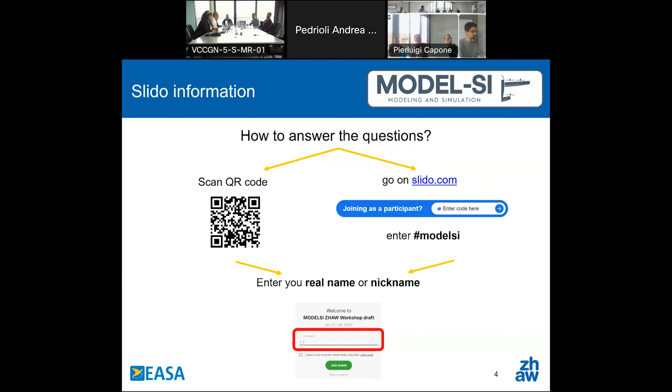And I will now hand over to Laurent Pinsard, technical lead, for a short background and rationale of the project. So first, we should remind you that modelization and simulation is a part of the EASA research activity program. And the objective of this EASA research is to explore methodology to determine loads on eVTOL.

Why have we selected eVTOL? In fact, eVTOL incorporates already lots of unique characteristics, like several rotors, which develop thrust and lift. We have also a complex aerodynamic with rotor interaction. We have fly-by-wire. We have flight conditions which are also unique, like hovering, forward flight or transition phase. And more particularly, we have also more demanding requirements for certification, like a rotor burst with a cascading failure scenario. So for all these reasons, EASA considers that eVTOL are a very good candidate to explore the complexity of the loads.

And up to now, the conventional approach selected for loads determination is the development of a complex CFD and an instrumented flight test campaign with correlation. We all know that CFD is extremely time-consuming and requires to be correlated. So considering the complexity of the eVTOL configuration, is there any alternative, with a simplified process, to determine the loads on eVTOL?

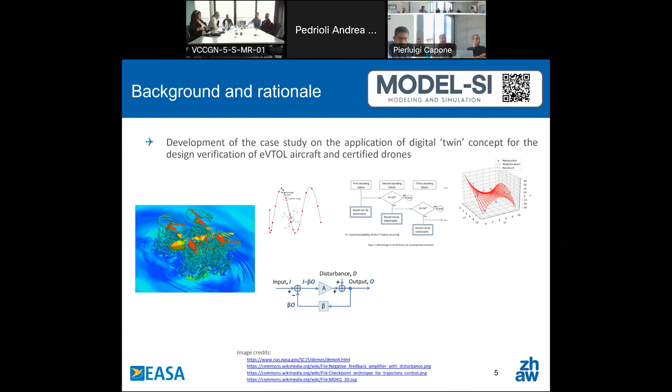And it is exactly what we want to do with this digital twin investigation: can the progress made in machine learning, artificial intelligence or data fusion offer this simplified approach? And starting from a simplified model, a loading model condition, is it possible to train or to develop a more reliable and sophisticated model with the help of machine learning? And how far can we go to reproduce or simulate a complex loading condition with this approach?

And is this approach also accessible to applicants who do not have a specific skill or expertise in artificial intelligence? Can we also propose a methodology to assist the applicant in this approach, a step-by-step approach? And eventually, how can this approach be estimated reliable enough for future eVTOL certification? These are all part of the questions we want to answer with EASA digital twin research. Thank you. I don't know if Elena wants to add something on this. No, it's also to mention failure cases, that there is a complexity of failures of individual rotors, how it can affect the others.

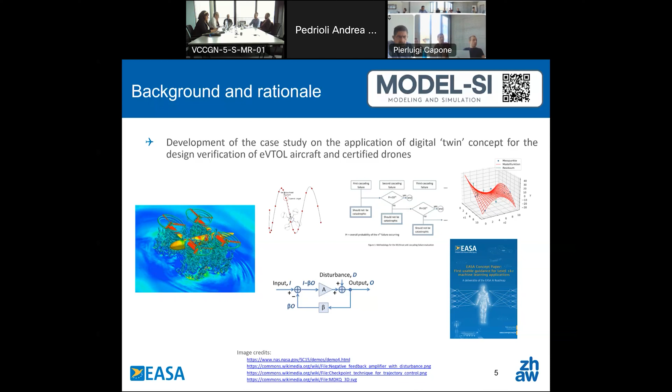Okay, and so thank you, Laurent, for your introduction on the project. My name is Andrea Pedrioli. I'm part of the Zurich University of Applied Sciences, and one of the experts of the Model SI project. I will spend a few minutes on the project goals and plan and state-of-the-art topics.

The objectives and the expected outcome, as Laurent said, are about the digital twin. We are going to explore different methodologies that will give us flight load envelopes and distributions on different eVTOL designs, maybe something exotic with various numbers of propellers, with different control laws and flight regimes. We'll try to explore the whole flight envelope, if possible, as well as, as Elena mentioned, failure or degraded conditions, and the different stages of development life cycles.

In parallel with this, we will support the aviation guidelines changes, so where we should adapt the certification activities to introduce these new technologies, this new digital twin, to help the certification.

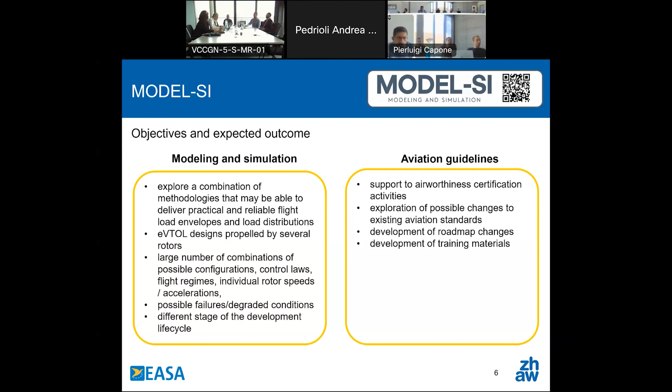Regarding the research topics, they can mainly be divided in four: multi-fidelity modeling of aerodynamic structures, rotors, and control systems. We'll spend some time later on more detail.

The second one, that's the broadest one. It's machine learning. We will explore different Gaussian processes and neural networks to leverage data fusion, to merge low and high fidelity methods together. And with this, we will explore the design space for optimization.

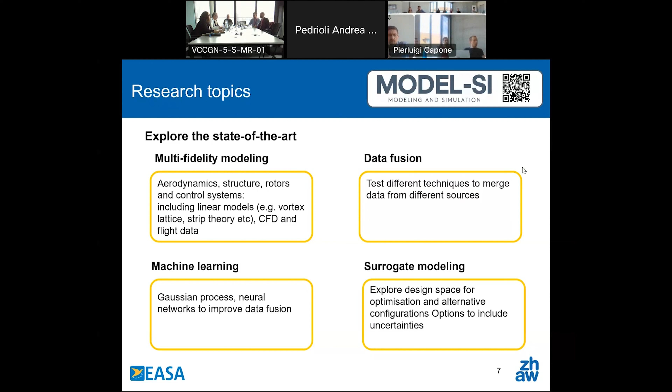The project itself will be based on a case study. We are going to define some quantities of interest. We'll show you later. Then we will build a low fidelity model, which will be our initial physics-based model. Then we will increase the level, passing to a high fidelity model, and with that we will build the first multi-fidelity surrogate model that will be corrected with some real experimental data, so with flight testing. And at the end, we will assess the uncertainties that the models bring.

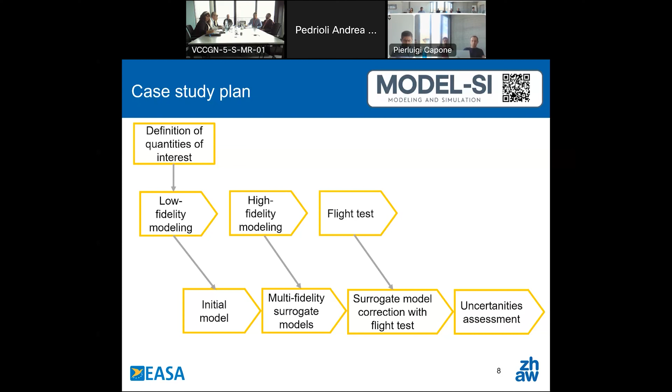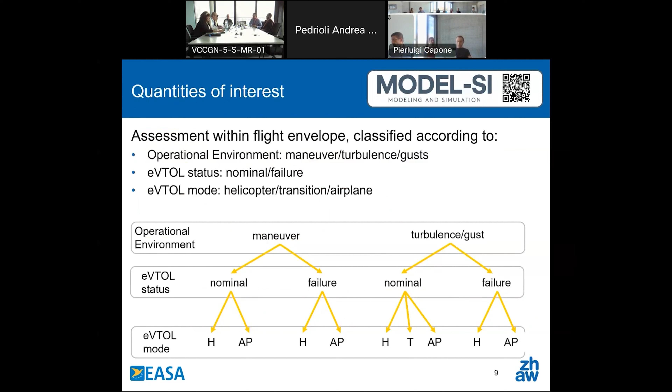The quantities of interest are divided mainly in three categories. One is from, let's say, a maneuver condition. The other one is in turbulent condition. Then it depends on the eVTOL status, so if it's nominal or failure, and then the eVTOL mode, so if it's in helicopter, airplane, or transition.

We will focus mainly on these quantities of interest in detail, which are internal steady-state loads on basically the main vehicle, then the total aerodynamic forces and moments, and the flight dynamics in trim conditions for the maneuver operational environment case.

In turbulent gust, we will focus more on unsteady responses subjected to different cases like altitude hold, or different dynamic rotor angular speed, or subjected to the dynamics of the nacelles, and as well flight dynamics response.

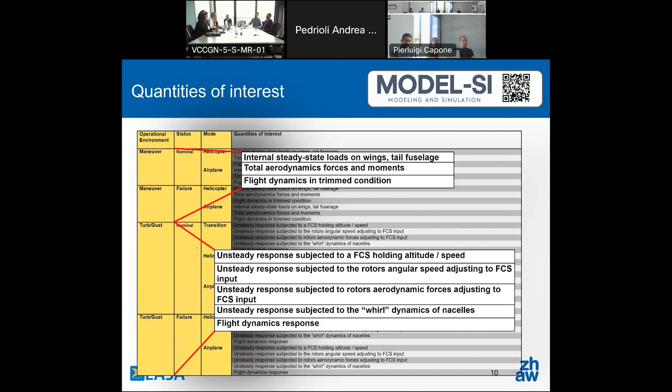My name is Marcello Righi. I'm a professor at Zurich University of Applied Sciences, and I'm also a lecturer at ETH Zurich. I also work as a CVE, compliance verification engineer, for the Swiss aircraft developer Pilatus, and have been involved in this project from the beginning.

So I will try to walk you through our methods, tools, ideas, and as Joanna pointed out right at the beginning, we'll be happy and grateful for every contribution you would like to provide us with. We've planned this project with some ideas, and if you can learn something out of our ideas, then we're happy. If you disagree, or if you have better ideas, then we are even happier if you let us know.

Our ideas are based on multi-fidelity, and we exploit data fusion to develop multi-fidelity models of a generic, or in the case of the project, a specific eVTOL, depending on the case study. I use this slide just to introduce our idea of a low fidelity model. When we say low fidelity, it is physics based, and it is something that runs relatively quickly, meaning something between less than a second on a laptop to maybe a few minutes on a more powerful desktop computer.

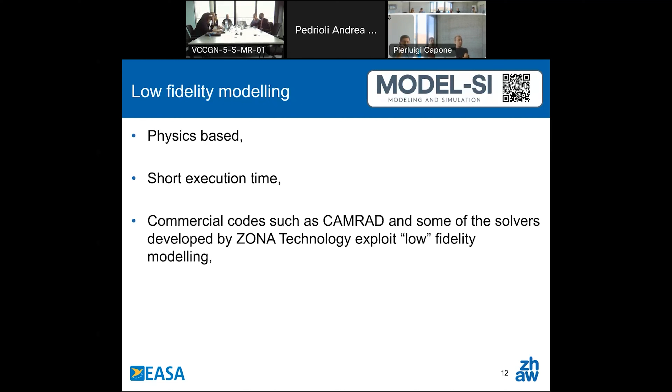We'll go through the different areas, and again, these are our ideas. If you believe that these definitions are not correct, not suitable, or obsolete, please let us know, and we'll be happy to update our slides. There is no one right solution. This is the way we interpret it.

So in our view, for structural dynamics, the structure can be modeled using FEM. In the 90s, for those of you who recollect those years, there was the stick model, an FEM model built with beam elements, with something like 100, 200, 300 degrees of freedom in total for wing, fuselage, and tailplanes. Something which nowadays on our hardware calculates a steady solution in a few seconds. Another option could be Ritz, or Rayleigh-Ritz, as it is often referred to.

That is even more efficient, even more computationally efficient. If I remember correctly, the CAMRAD/JA, the old one, was based precisely on that.

Now, the second area is rotors / propellers, and we have had a number of discussions, and it's been a hot topic in our regular meetings here. I started saying that I would model it with a prescribed wake and with something as simple as blade element. And then we discussed among ourselves and with Elena and Laurent, and in many cases we had objections here. Say, okay, prescribed wake, are you sure? And well, we'll leave it open.

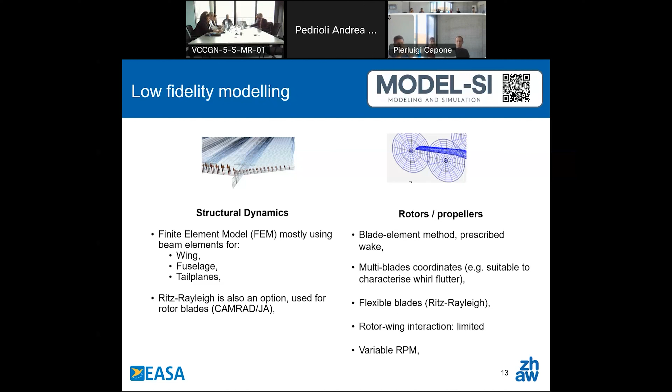And as far as the more conventional aerodynamics is concerned, so let's say wing aerodynamics, a low fidelity model typically is the vortex lattice method, and can be DLM. I personally sometimes still use strip theory for a number of reasons. And you can have strip theory, you can correct it for the span-wise distribution of lift. And the good thing is that it's unsteady.

Well, DLM is unsteady, and you can implement a Theodorsen and aerodynamic lag function based model to take aerodynamic unsteadiness into account. You can do this in time or frequency domain. And we have, of course, a flight control embedded in the low fidelity model. This could be as complicated as it needs to be. And we'll see in the high fidelity slide.

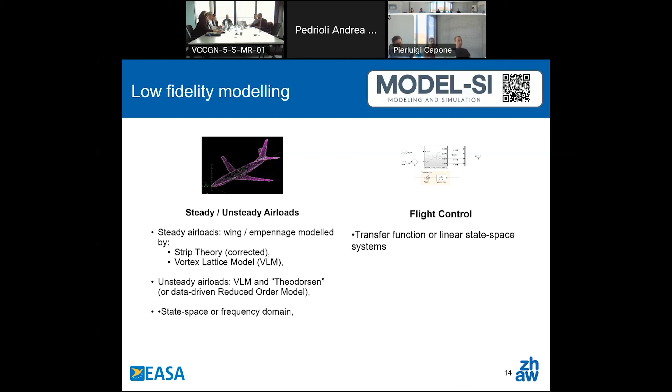But that's also the great advantage of the low fidelity model, that you can really build in everything you need, every component, every subcomponent that you believe is relevant. And what you have out of this model is, again, very quick and allows you, for instance, to calculate the dynamic response in the entire flight envelope in a useful time. It's not like pressing a button and coming back one week later as you do with CFD.

It's something which provides you the entire loads, for instance. Andrea mentioned the quantities of interest, mechanical loads, for instance, for the response to one particular gust, and you have it within minutes, if not seconds, and in a number of different configurations, of course. It provides you with steady loads, with response to unsteady pilot's input or gust response, for instance, and it allows you also to propagate uncertainties.

So you can decide that your problem has a number of aleatory uncertainties, so quantities you're not sure about, and you can do your analysis a number of times, varying these parameters, and typically this is something you call Monte Carlo, and there are mathematical tools, methods which make Monte Carlo more effective, such as polynomial chaos. Just an example.

And the other thing you can do with the low fidelity model is the assessment of dynamic stability. So you do it in an entire flight envelope. You do it for the number of configurations you need, and you can determine very, very quickly the dynamic stability, linear stability, which means the eigenvalue analysis of the system.

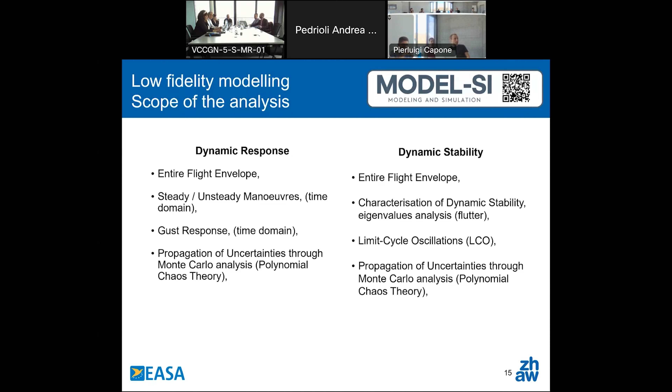And again, the whole thing is very, very quick. Now, of course, as I mentioned right at the beginning, we were talking about low fidelity models. So it's very, very quick. It's complete. It has everything in. It's not perfect. And the physics, and I believe that Laurent mentioned it right at the beginning, the physics is complex here. And so we cannot expect a low fidelity model, we cannot expect VLM strip theory to capture everything that needs to be captured there. So low fidelity is good, some basis, but we need to look into

also alongside the low fidelity model, we need to have a high fidelity model. And the high fidelity model, in our view, and again, feel free to disagree and provide us with your comments, your criticism. We'll be happy and very grateful for that. So we call a high fidelity model a model which is physics based, and it may have an execution time of up to a number of hours, and maybe some of the participants have direct experience with CFD analysis of these particular vehicles in more than one configuration, and you can testify it takes a long time.

So the CFD simulation of one wing with one rotor as actuator disk takes a few hours to converge, and this is probably the simplest option we have here. So again, high fidelity, physics-based, computationally demanding. And it might be limited to steady state, so it allows us to calculate a steady state of the response. You can use it to calculate flutter speed. You can do that. It takes forever.

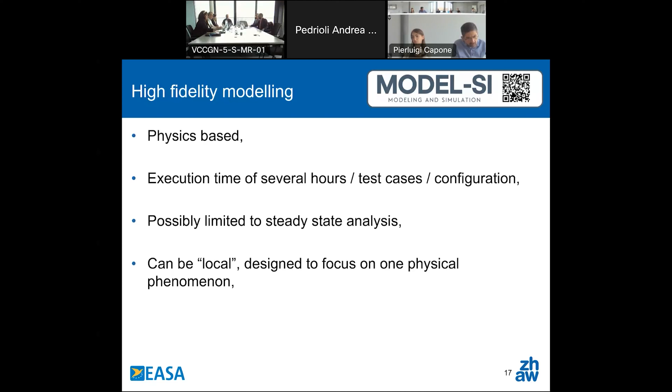So I believe you mentioned right at the beginning the interaction between rotors and wing, and we can have a local, limited CFD model looking precisely into that, and so we keep the high computational cost within limits. It will still be high, but maybe we can bring the computational time down from 6 months to a few hours, a few days. Right. So again, our definition. Feel free to disagree. Feel free to propose your solution.

And again, our idea is the structural model is FEM, not a stick model, a complete FEM with different types of elements, maybe a few 100,000 degrees of freedom, maybe 1 million, something like that. And nowadays this runs no problem even on a small laptop computer like this one. And again, many of you maybe have experience with NASTRAN and Abaqus, which is probably written with a Q and not with a C, so I apologize.

And so you know what I'm talking about. And in some cases, you build your Abaqus model, and then you reduce it. So you don't do it as a complete NASTRAN, Abaqus, ANSYS, whatever model, but you carry out a model order reduction, modal order reduction sometimes.

And now, the most important one, the rotors / propellers. I mentioned just a minute ago, we can have rotors represented in the CFD domain as actuator disk, which is an idealized disk. We can either have a physical mesh, or if you calculate with overset, Chimera, you can have a physical disk mesh inside your standard regular CFD domain, and you apply some source terms into the solution. So you have the thrust coefficient, you have swirl across the rotor.

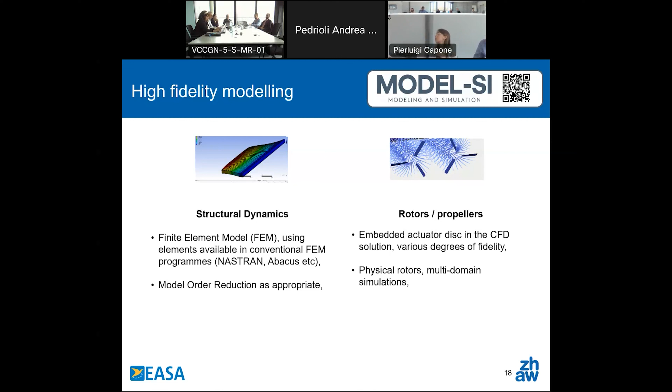And now the regular aerodynamics, so wing and fuselage aerodynamics, could be CFD, could be RANS, so Reynolds-averaged Navier-Stokes equations. It could be RANS with a transition model, if you trust these models, and this can be useful, can be even necessary at low Reynolds. So speaking the eVTOL word, now we can picture in our minds their particular configuration. Some of them have a reduced chord, so Reynolds number can be low, and if Reynolds number is low, then transition will be an issue. So you can have laminar separation bubbles appearing here and there, and to represent them correctly, you do need the transition.

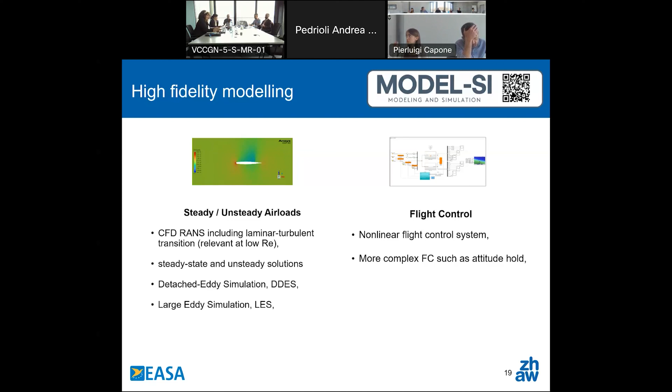And again, flight control can be made as complicated as we wish. So we can do a lot even in the low fidelity counterpart of this, but having the computational power, we can really have it as realistic as we would like it.

And on the other hand, what we expect you can do with a high fidelity model is dynamic response at a few points. Unless you do have at your disposal a significant computational power, then you can afford a large number of flight points. You can afford simulating maneuvers, so even a time-accurate response to pilot's input, for instance, or you can simulate the response to a gust encounter in time domain.

In most cases, I believe that even the large manufacturers which have access to virtually unlimited computational time tend to limit this analysis, not because they cannot afford it, but because it's not so practical. With this kind of simulation, you start them on Monday morning, and you have the results maybe close to the end of the week. So by the time you have the results, you might have forgotten what the settings were, so it's something people do within limits, I believe. But again, feel free to disagree and provide us your opinion on that.

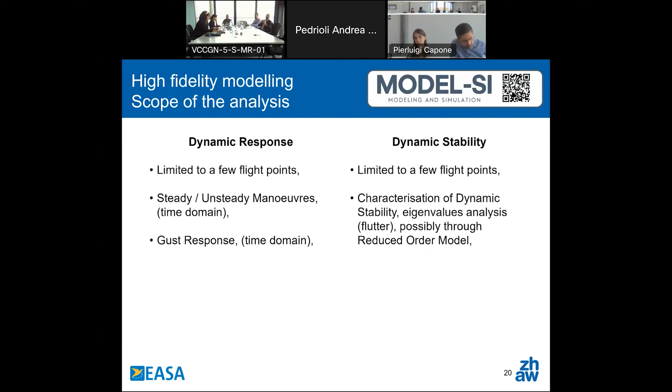So you have a high fidelity model, you generate a number of responses. Your responses are treated as data, and with the data, you can obtain a data-driven reduced order model. With the aerodynamic reduced order model, you can carry out your flutter analysis, and you can explore a certain area of the flight envelope.

And so we mentioned right at the beginning, and I think Andrea mentioned going through the flow chart, the different blocks, the multi-fidelity and data fusion. So again, this is our idea, and we've read about that, we have little experience in that, and we believe that multi-fidelity could be a way here.

And it means building a multi-fidelity model, or you can call it a surrogate model. And a surrogate model is not physics-based, it's data-based, it's data-driven. And it means that in practice, and some of you are surely familiar with that, the low fidelity and the high fidelity models are, so to say, merged into a third model, which is a multi-fidelity model or a surrogate model. And this surrogate model, or the outcome of data fusion of this multi-fidelity entity, is in theory as fast as the low fidelity model, and in theory as accurate as the high fidelity one.

So as accurate, not everywhere, of course, but in the relevant points inside the flight envelope. So it is accurate where we need accuracy. And maybe some of you have direct experience in kriging, and so maybe you're more familiar than we are in this activity, and this is often done on the basis of Gaussian processes, and in particular kriging and co-kriging. So you use kriging with the points from your low fidelity model, and you develop a second one, a co-kriging. You do co-kriging in order to build your multi-fidelity model.

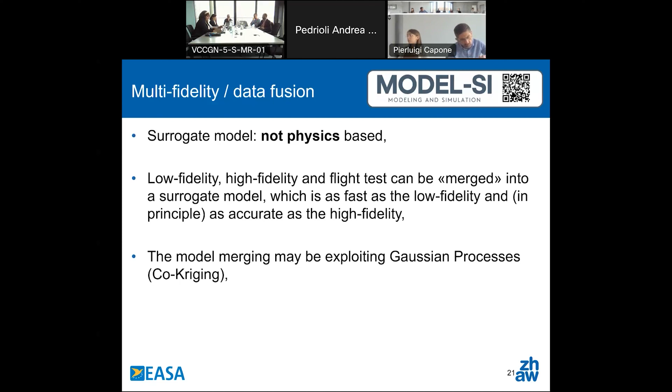So as our idea, we'll go through a few examples, and hopefully it will be more clear looking at the examples. And before we do that, a few comments about what we expect from machine learning. I will quickly mention the result of a literature survey. If you look at the relevant papers issued in the last couple of years, then machine learning is everywhere. So it's very well known. You don't need to learn it from me.

And in this particular project, we believe there are some areas where machine learning is useful. Again, we just mentioned one slide back, data fusion, and it looks like Gaussian processes can be exploited for that. And Gaussian processes are often classified as machine learning. You can do the same with neural networks. So if you're unhappy with regular Gaussian processes, you can tailor-make your neural network. It takes a little bit more time. It takes more preparation. You have to be familiar with that, but you can really drive the accuracy or maybe the uncertainty computation to the level you want it to be.

So, example, data fusion, either GP or your neural network, or if you do this with a different approach, please let us know. We'll be most grateful. And on top of that, machine learning is very useful with the high fidelity data. High fidelity models tend to generate lots and lots of data, and sometimes the amount of data is overwhelming, and it takes really a long time to look into it and try to identify, well, what is the vortex? Is this vortex relevant? Is this vortex important in characterizing the interaction between the rotor and the neighboring rotor, between the rotor and the wing? And we have a number of examples of algorithms which can be used to capture patterns inside, for instance, a CFD solution. And again, this is what you use machine learning for.

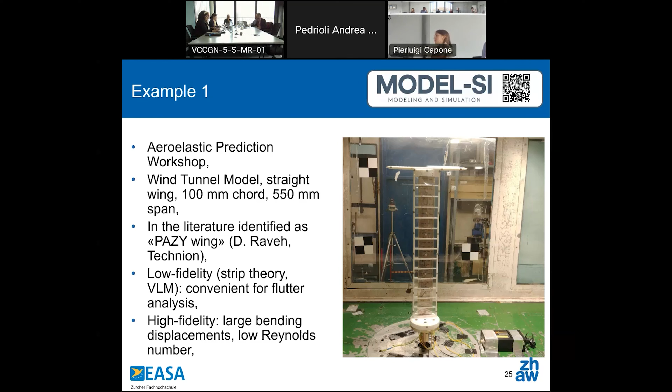Just to give you an idea, let me see if it starts. This is a static wind tunnel test at ETH Zurich. It gives you an idea of the static displacement. It wasn't even too fast, 30 meters per second, something like that. And you see the displacement is really large. So VLM, even strip theory, is not too wrong here, but it's not trivial. Sorry.

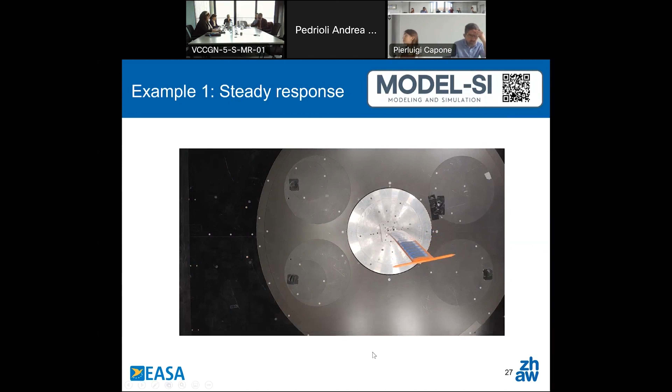Wait a second. Right. The nice thing is that in a wind tunnel you can characterize the steady response and the unsteady. You can relatively easily see the limit cycle. For a given speed, the system becomes unstable, and you can identify flutter speed. Luckily there are some nonlinearities, so it does not explode, breaking the wind tunnel and causing large damages, but it evolves into a limit cycle oscillation.

Was there a question or anything we need to stop for? No, there are a few questions. Okay. So if you have any for the examples, please drop them in Slido. There is the QR code. Over here. By the way, you can access it easily. Good. I thought I saw. But anyway, if there is anything urgent, just stop me now.

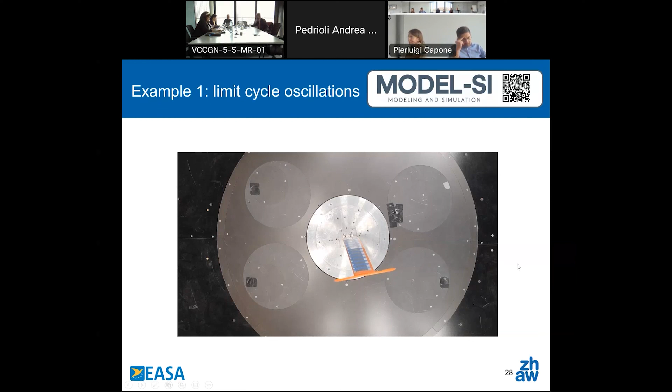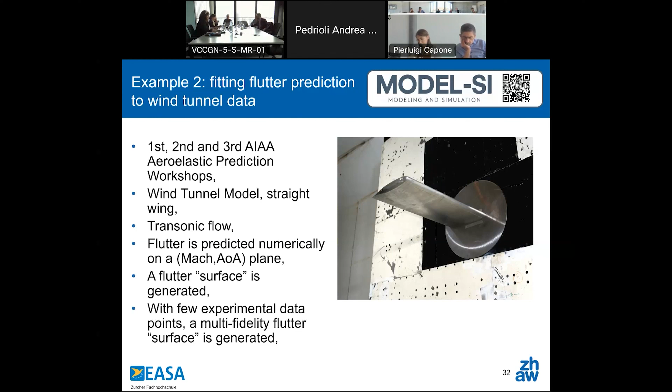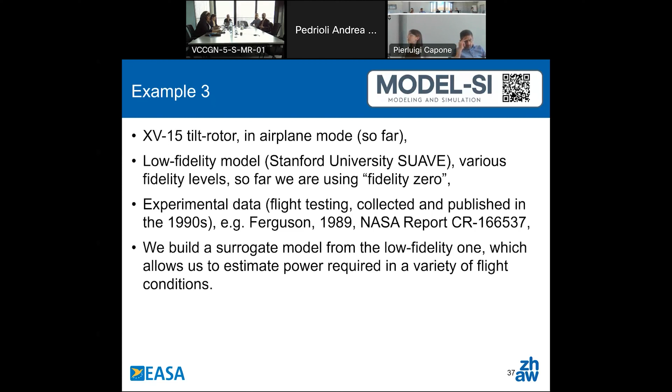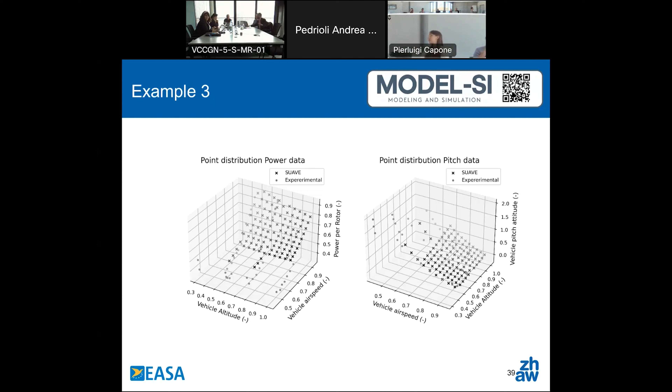On the left-hand side, you have power required per rotor. On the right-hand side, we have the pitch attitude of the vehicle. And again, it varies with the airspeed. We have two parameters here: the altitude and airspeed. You see, these two quantities tend to vary a lot with airspeed, a little bit with altitude. And you see, the points are not too far from each other. And we can use data fusion here. Again, it was not easy, but it was possible. So again, very young results.

And it means that with a relatively inexpensive tool like this SUAVE, exploiting the flight test data which is publicly available, you can build a multi-fidelity model which is very quick to run and is accurate enough to match the flight test data.

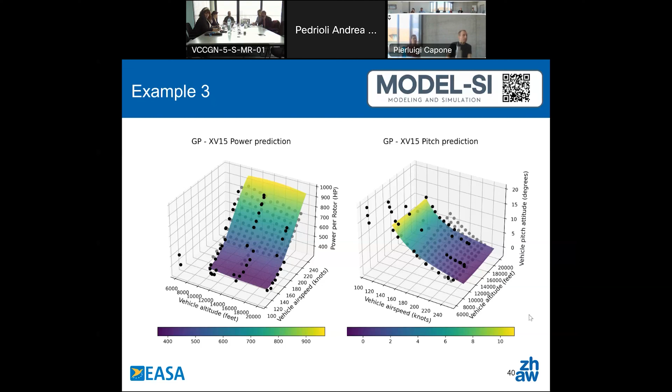Good. So right at the beginning, in January, February, we went through a review of the available literature, and it became immediately evident that looking at the last couple of years, there are three areas in which the number of papers published is large and increasing. Namely, one of these areas is eVTOL itself. So there are many publications on new configurations and how you would exploit these configurations.

The second area is the famous or infamous digitalization topic, in particular papers dealing with the suitability of more simulation, more digital process in aircraft design and certification, with, I would say, emphasis on both design and certification.

And the third topic is how machine learning is applied to aircraft design and to modeling, and how it can improve modeling, how it can make modeling more accurate, more quick, more effective, or whatever advantage it can provide you with.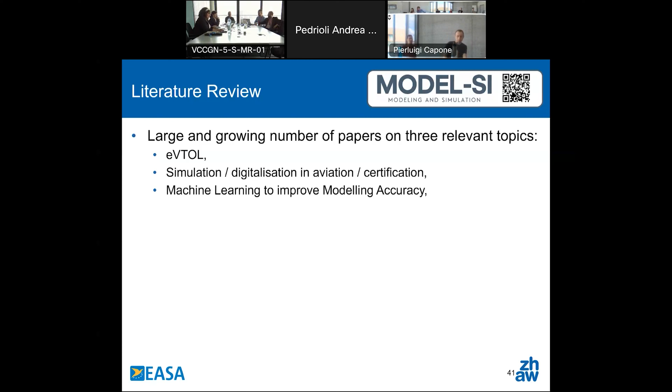And now, again, briefly, in these slides I collected some statistical data about the content of the AIAA SciTech conference 2023, held this January, about 27 January 2023, simply because it was easy. In SciTech we have a few thousand contributions, and they are all collected the same way. They're very uniform, and it's very easy to search.

Now you can do the same with the websites of the various publishers. Of course, you can do Google Scholar, but within the same conference, it's even easier and faster. And the great advantage is that the contributions are more or less homogeneous, and they come mostly from engineering. So there is a certain uniformity among papers. And looking for eVTOL, we have about 120 papers out of a total of a few thousand. So not too much, but still, it's not a little number.

And again, many papers deal with design, meaning optimization, and others. A number of them were focusing directly on aeroacoustics, and that is a big one for eVTOL. And some others were focusing on what to do with eVTOL. So how eVTOL can change the way we fly, we move goods and people, and also how we can let them fly autonomously, and how this type of flight can be certified.

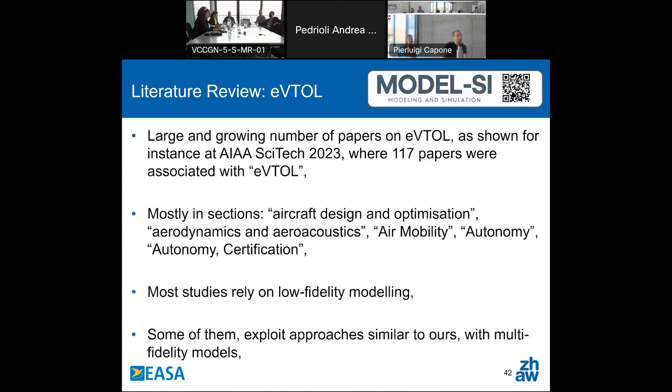Now, digitalization in certification process. We didn't see much actually at SciTech here, but I will mention three bullet points. One is this NASA technical report 2021. The other one is the AIAA white paper on digital twin. I believe it is 2021, and I don't know why I forgot to add the date, so I apologize for this. It's probably 22, but again, I apologize for the missing date.

The other bullet point is not a publication; it is a reference to this EU project, ROCS, I believe the acronym is, and I believe that our colleague is online. He's welcome to share his point of view and the way he or they see the role of digitalization in aircraft design and certification. And again, it's meaningful to have an EU project funded on this topic. It testifies to the relevance of this type of analysis.

And the last one is about the role played by machine learning. There are 1 million papers being written every day, but if you limit the scope of our analysis to SciTech 23, we have about 300, and a number of sessions devoted to machine learning. SciTech is huge, you have hundreds, maybe, of parallel sessions, and 6 of them directly mentioned machine learning. We have papers on data fusion, 23, papers on surrogate modeling, 130, and papers on multi-fidelity, about 130.

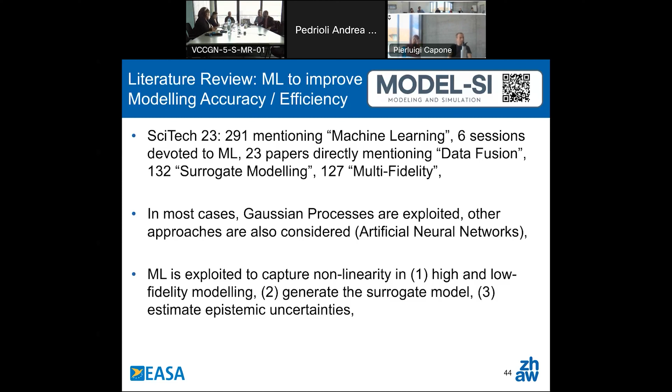Is it the end? Yeah. Good. So we reached the end of our slides, and if I haven't forgotten anything, we can look into the questions. I think just before moving to the questions, we can summarize from this presentation the EASA understanding of these activities.

We have questions, and the first one is: is the machine learning approach feasible and achievable, meaning to educate a simplified model to reach the level of a high fidelity model? It seems that according to your presentation, it should be. It is feasible. The question is the cost of this. Another question we can have from your presentation at EASA level is why this machine learning approach should be selected for eVTOL loads determination.

So you mentioned that it's quicker, cheaper, and it provides a comparable result from a high fidelity model. But the next question is how much effort or energy you should put in the system to reach this, and at the moment it's a question mark. And in fact, also what is the process to use artificial intelligence, and how an applicant can succeed to do that. Is it achievable at the applicant level? It's part of the question we still have.

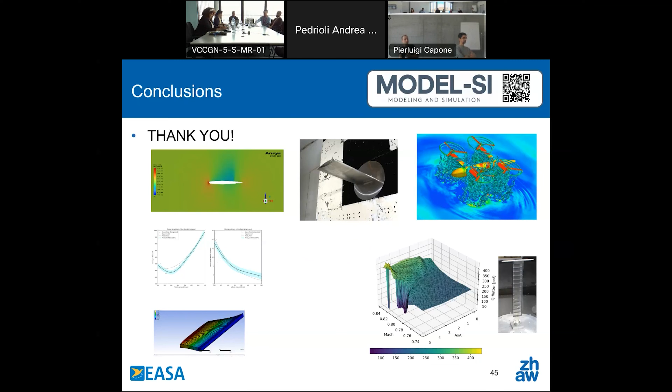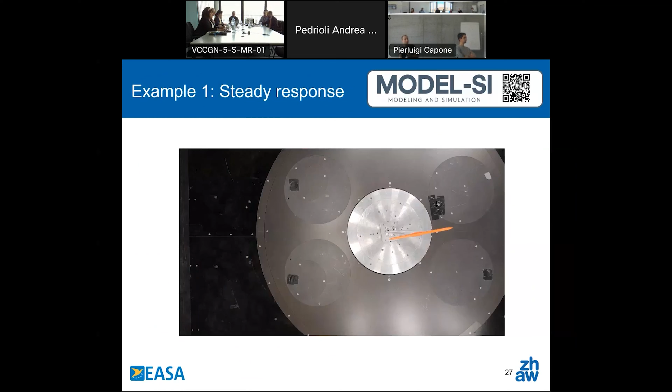Absolutely. That's a good one. Yeah, absolutely. We can say that the tools, the methods themselves, so the software you use, benefits from a high level of validation. Where was it? No, it was here. I remember it was before the examples. Yeah, it was here. The tools themselves are absolutely reliable, in my view. So you can trust all this.

You can trust MATLAB. I apologize, I didn't write MATLAB in there, but the tools themselves are absolutely reliable, in my view. You can count on them, many users every day. So the tools themselves benefit from a high degree of validation. The validation of how the tools are applied here, that's a completely different matter. And I agree with you that this is precisely the most important point we would like to explore in this project.

So we have a complex physical problem. We have very good tools, and we would like to apply these very good tools to the solution of the problem at hand. And this is precisely the challenge, the gamble here. So we would like to show that it works, that the tools are very good and they can be applied. So this project itself will be a preliminary or initial validation, or will provide hopefully some elements of validation. But so far, as of today, I personally have no evidence yet.

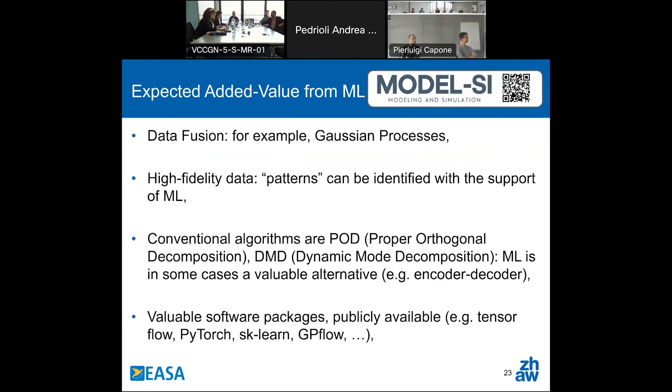If you would like to explore the flutter speed outside of the range we showed here. Wait, no, it's a later slide. Where is it? Yeah, if you want to interrogate the model about flutter speed at Mach number higher than 0.84 and at angle of attack of 5, then your response will be associated with a high uncertainty.

So it really depends on the data, and I believe it's a question of common sense. Just to stay on this example, if you want to extrapolate the flutter speed or dynamic pressure here at angle of attack -1 and low Mach number 0.74, you can do it, and the associated uncertainty will be limited. You do it on the other side, and it doesn't work.

I believe the key here is, and you must be touching on this point in your ROCS project, probably to carry out your analysis, low fidelity, high fidelity, whatever analysis, in a sufficient number of points, even outside of the flight envelope. And it's not an easy question to answer. It goes again to the limits of the validity of the approach we propose.

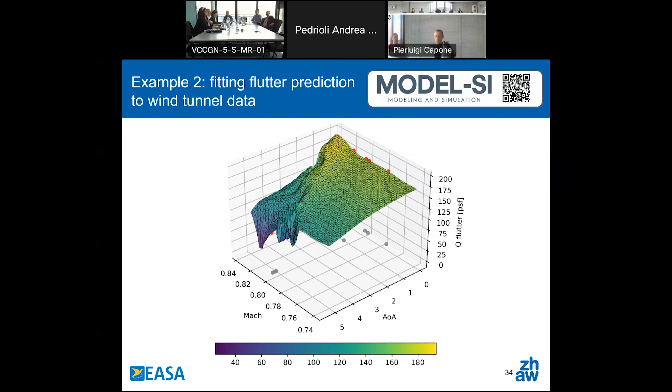Regarding uncertainty, Professor Quaranta is asking about example one. How did you assess the uncertainty there? Is it related to numerical model uncertainty or to experimental uncertainty? Thank you very much, it's a legitimate question. I normally distinguish between the uncertainties associated with the process itself, called epistemic, and the uncertainties associated with not knowing exactly the system, the aleatory uncertainties.

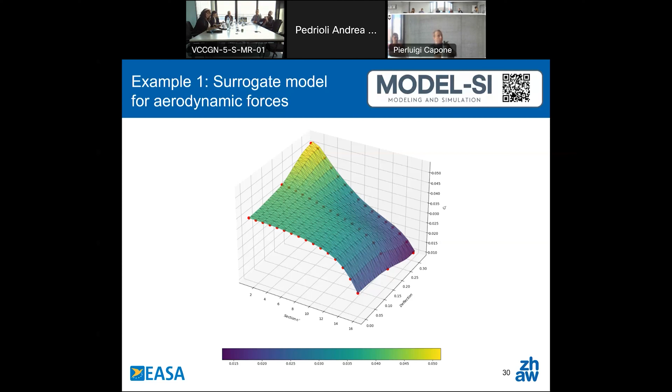Now, about the first one, the epistemic uncertainties: if you work with co-kriging, your result comes with a confidence interval. So you have the mean value and a confidence interval, so you have an idea. Again, with a Gaussian process, quantities are distributed according to Gaussian curves, and everything is expressed as a Gaussian quantity. So you can fix your 1 sigma, 2 sigma, 3 sigma confidence interval, and this is a byproduct. It's a relatively simple framework.

Now, about all the other sources of uncertainty, there are a number of approaches available, and my claim here is that if your multi-fidelity model is fast enough, then you can exploit a framework which we might call Monte Carlo. You don't do Monte Carlo, it's too expensive, but you can work with methods such as polynomial chaos, and you can run your analysis against one or a number of quantities of interest.

For flutter speed, you can calculate flutter speed a number of times, and each time you vary the random variable you're interested in. So, I'm not sure how realistic it is, but you can carry out your flutter speed assessment varying slightly the material properties. So you're not too sure about the material property, and so you vary it a little. You vary, for instance, the Young's modulus a little bit, plus minus 1%, you sample n different values for the property or properties, and then you carry out your flutter analysis n times.